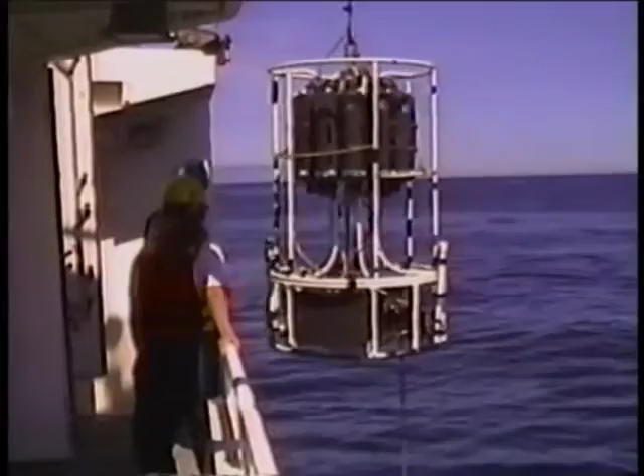Hi, I'm Mark Abbott, Dean of the College of Oceanic and Atmospheric Sciences at Oregon State University. The college focuses on graduate research, advancing the frontier of knowledge of the ocean, atmosphere, and Earth system, continuing to explore the edge, the interfaces between ocean and atmosphere, ocean and ice, land and sea, and deep ocean and sea floor. The college is one of the leading academic and research units at OSU and was ranked 5th nationally in the Decadal Survey of Graduate Programs by the National Research Council.

The college research benefits the state of Oregon through studies of its coastal ocean, tectonic hazards, and atmosphere. Along with research, the college supports graduate programs in oceanography, atmospheric science, geophysics, and marine resource management. The Native Americans in Marine and Space Sciences program is also housed within the college, and it provides effective mentoring and educational opportunities for Native Americans.

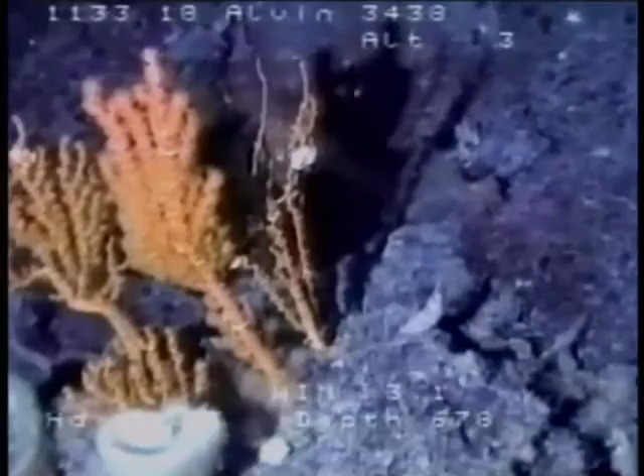The college is home of the Oregon Climate Service, which provides an enormous range of data products and analyses for customers in the Pacific Northwest and beyond. The college remains at the forefront in the development and use of observational and analytical instruments. Observations of small-scale ocean physics are pursued with increasingly sophisticated instruments developed by college researchers. The emergence of ocean and atmosphere observing systems, including coastal observations and seafloor cabled observatories, afford new opportunities for sustained observations of our ocean and atmosphere.

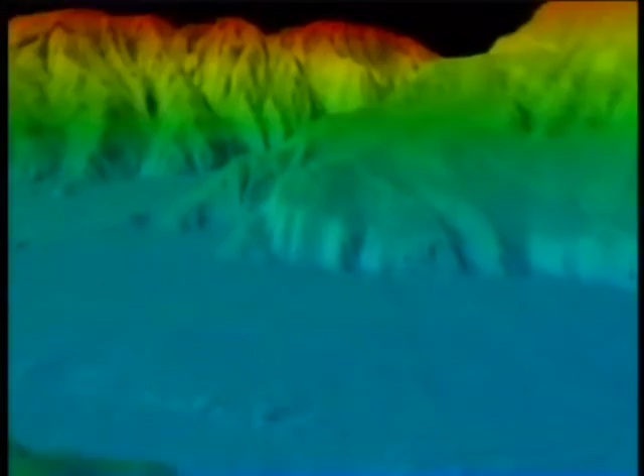Our leadership in satellite remote sensing of the ocean expands to ensure that future instruments meet the needs of both the research community and those who could benefit by these analyses. We continue to expand and upgrade our state-of-the-art analytical facilities to provide access to both college and non-college researchers. The college continues to build on its interdisciplinary focus, integrating atmospheric sciences with oceanography and focusing on the interfaces between ocean and atmosphere. The college is uniquely positioned to study the Earth system, both in the context of global scale research and local processes such as those that take place in the coastal ocean.

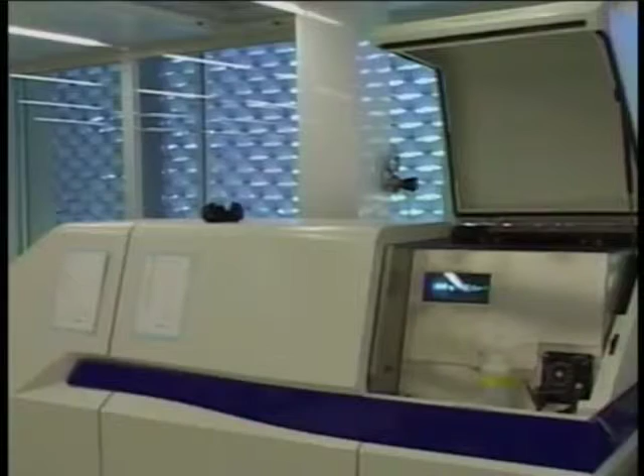Each of these research activities highlights the college's continuing commitment to research and education, relying on state-of-the-art technology and facilities. Our newest facility, a clean room developed as part of the W.M. Keck Collaboratory for Inductively Coupled Plasma Mass Spectrometry, in collaboration with several industrial partners led by Huntair, places the college at the leading edge for a vast array of new geochemical analyses to support research in geological, chemical, and biological oceanography. I would now like to introduce the Keck Collaboratory Director, Gary Klinkhammer.

Hello, welcome to the W.M. Keck Collaboratory for Plasma Spectrometry at Oregon State University in the College of Oceanic and Atmospheric Sciences. Our facility has actually been here over 10 years, but the clean room part of this is just completed. In fact, it's still under development. So at this point, that makes it a little easier for this presentation because we can show you some of our technology in a little simpler way.

What we do here at the Collaboratory is state-of-the-art science. In other words, we have equipment called plasma mass spectrometers. In this facility, we actually have 4 of these very sophisticated instruments. And these instruments are capable of measuring basically all the elements on the periodic chart. So in this facility, we're able to look at the elemental composition of just about anything on Earth and tell you what that's composed of. Now, while that sounds very esoteric, actually there's some very practical applications of this kind of technology, which we'll get to in a minute. So let me show you some of the instruments that we have here at the facility.

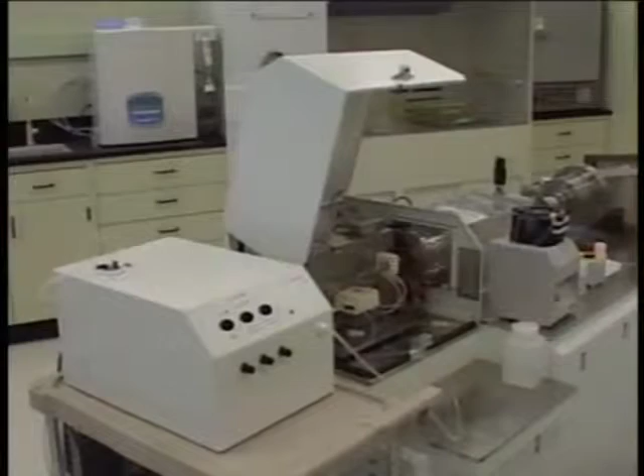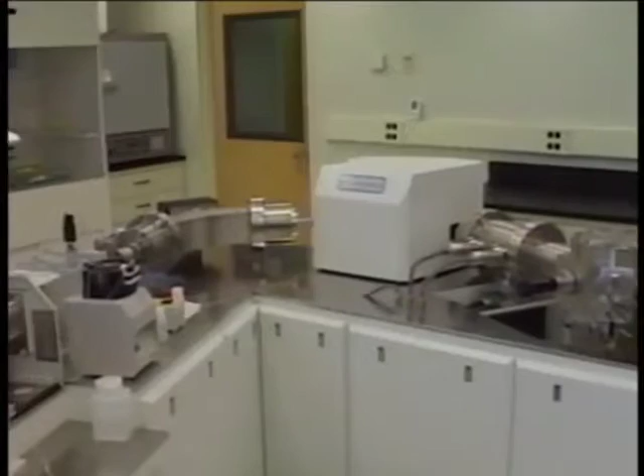Now this beautiful instrument represents the cutting edge of this kind of technology. This is the kind of instrument that we use for a lot of different things. It's very good at measuring the isotopic composition of materials. And this kind of instrument could be used for anything from measuring water quality to dating the age of the moon, for instance.

So there's a whole suite of science projects that we can undertake here now with this kind of instrument. But all these instruments, as I said, have this open front end. So they all require that the atmosphere the instrument lives in is very, very clean. Now this kind of requirement is rather new. This kind of instrument has only been around a couple years. So more and more, this kind of application requires really good clean room technology.

Now Dave Benson of Huntair was the first one to tell us about the possibility of having this kind of controlled, focused, clean air environment. And that's really the topic of this presentation. So the fan filter units that are above these instruments focus clean air down to where we really need it, which is where the sample is introduced into the machine. So the rest of this presentation will be talking about the fan filter units that make all this possible.

And so now we're going to go down to the studio, and I'll introduce the panel of experts who are going to tell us more about this great technology. Welcome. This part of our presentation is being brought to you live from the beautiful campus of Oregon State University. And what we want to do here, as I said, is describe the fan filter units in greater detail.

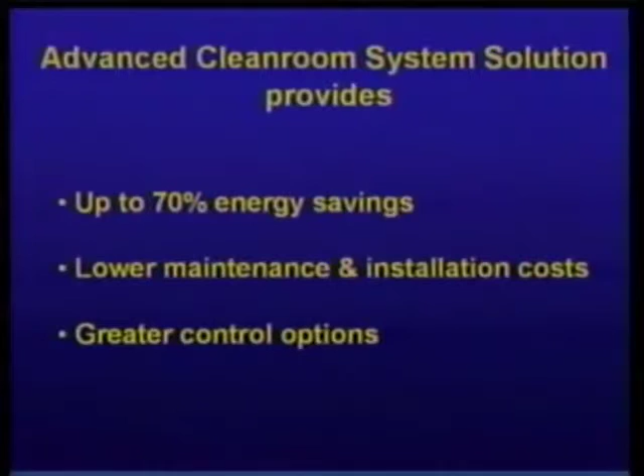We're going to be talking to the GE folks later about some of those control options with this technology. We can say that this technology is the perfect solution for our application, and that's pointed out in this next slide.

That's where science is today, and that is key to where we're going in the future. So the lower levels we can see, the better, and this technology allows us to do that. Makes our job a lot easier.

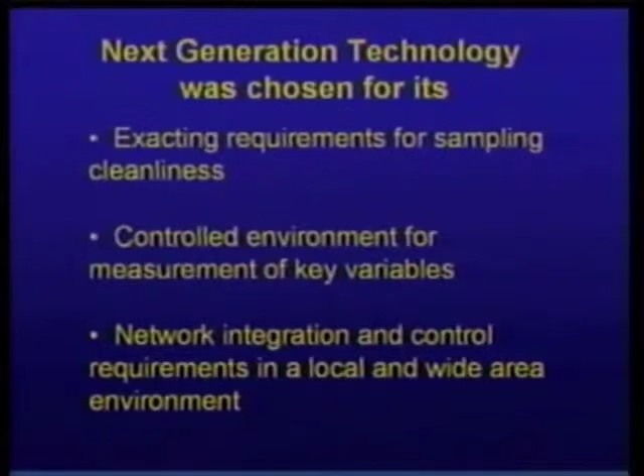Now, if we go to the next slide, we'll see some more broadly successful management of these conditions and where these things can apply. For one thing, they can apply to research and development facilities, which is what we are. But as we'll get on later in the discussion, we'll see that there's a wide range of other industries and research facilities that require these similar kinds of capabilities.

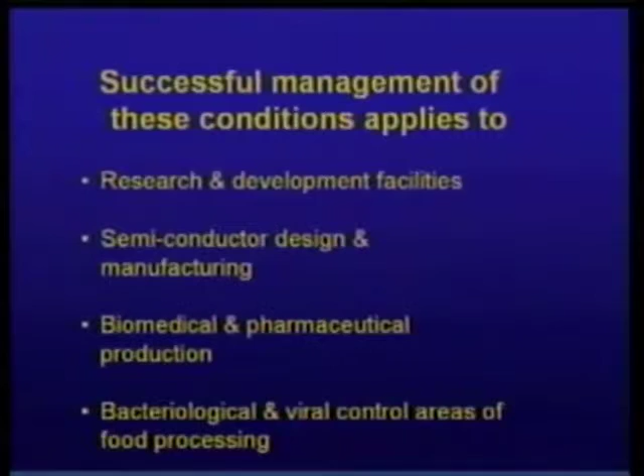Semiconductor design and manufacturing, biomedical and pharmaceutical production, bacteriological and viral control, areas of food processing. And I'm sure there are a lot of others we haven't thought about, and I'm sure you guys out there have thought a lot about it. So there are a lot of areas that this kind of technology can have an impact. It's a tremendous advance forward.

And if we go to the next slide, we can see I just want to point out again the 4 primary contributors to our project: GE Industrial Systems, who have made the advanced motors and motor controls that go into this fan filter unit, and GE Fanuc, who integrate the network controls - we're going to have Steve tell us more about that.

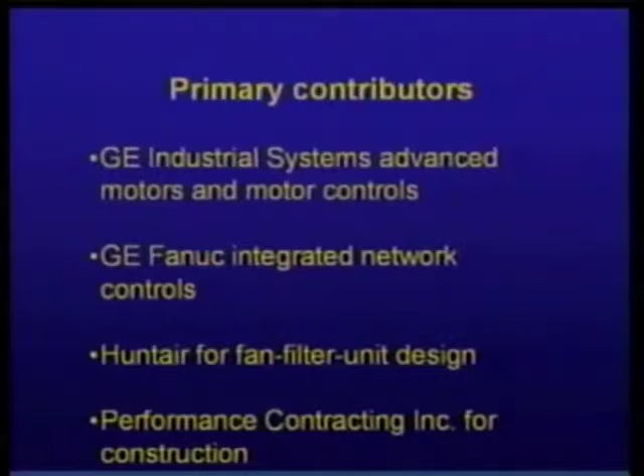Huntair came up with the fan filter unit design itself, and in our case, Performance Contracting Group, Inc. actually installed the equipment in our facility. So what we're going to do now is go around the table and let each of our experts tell us more in greater detail about their part of the project.

So now let me present Dave Benson and Larry Hopkins from Huntair, who will give us an overview of the room and the challenges they faced when doing this project.

Thank you, Gary. One of the primary steps that we must undertake, like Gary described, is understanding the process that needs to take place within the facility, and designing the equipment to specifically meet the needs of the science or process that takes place within the facility.

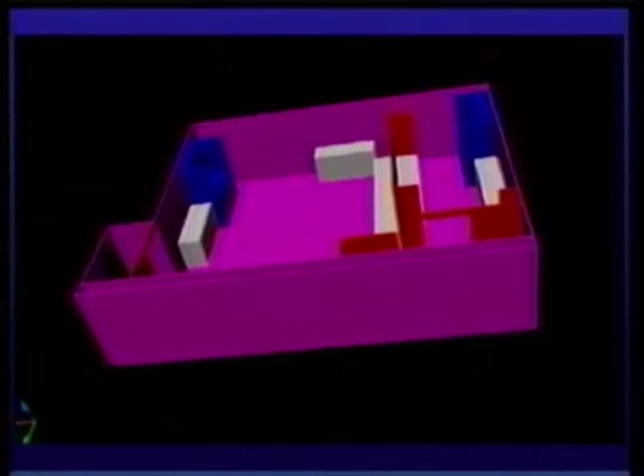In this case, if we could have the next slide please - we utilize extensive modeling to assist us in our design and application of our equipment. This 3D model is of one portion of the laboratory where we can identify the various different pieces of equipment that are in the space, identifying the cleanliness levels and requirements for each piece of equipment, and identify points of supply and return out of the space.

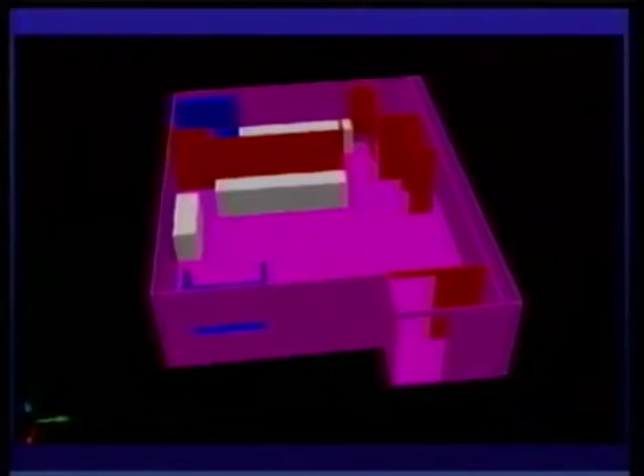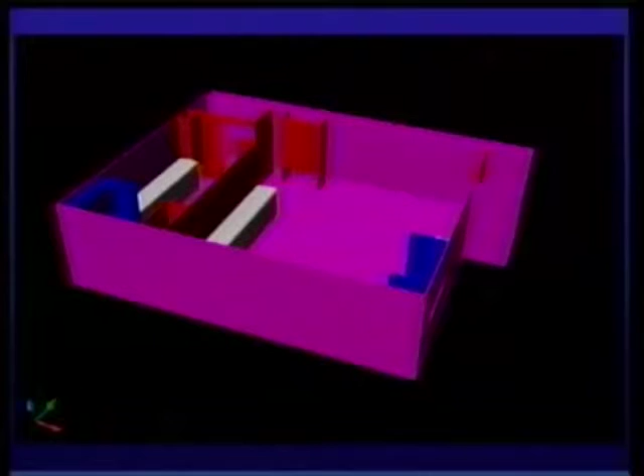Next slide, please. We were very limited in overhead space to incorporate the mechanical components that were required to achieve these objectives in the space.

Along with the 3D model of the space itself, we use extensive use of computational fluid dynamic modeling to help us understand the velocity profiles and pressure contours within the space so that we can assure ourselves, as well as the university, that we're going to achieve the results before physically building the building and turning the power on.

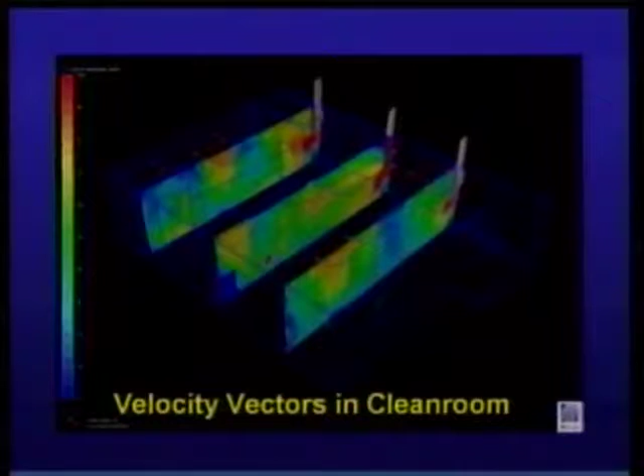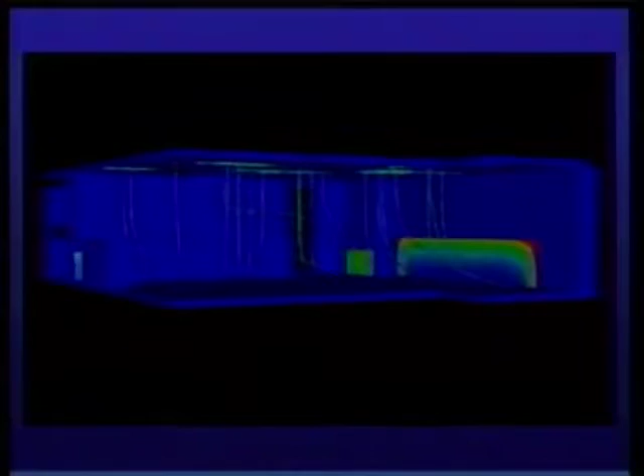Next slide. And this part goes into a technical aspect of then our FFU, which I'll refer over to Larry Hopkins.

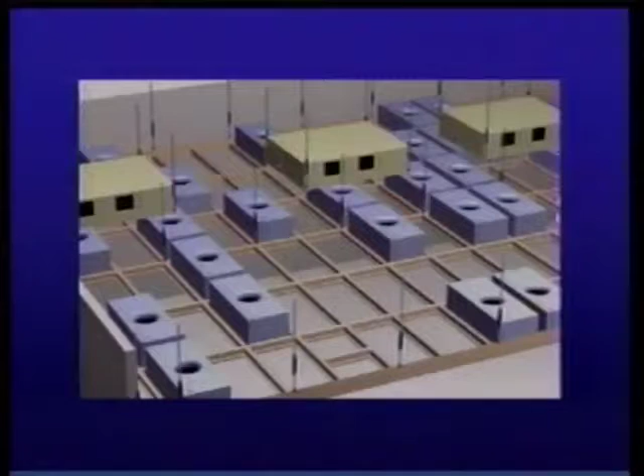Thank you, Dave. At this point, we'll talk a little bit more about the FFU and what was physically changed, or what is different about this generation of FFUs that gives us an energy advantage. At Huntair, we're very familiar with the requirements of semiconductor, pharmaceutical, and biotech facilities in terms of cleanliness and extreme standards set for vibration, airflow, uniformity, and energy consumption.

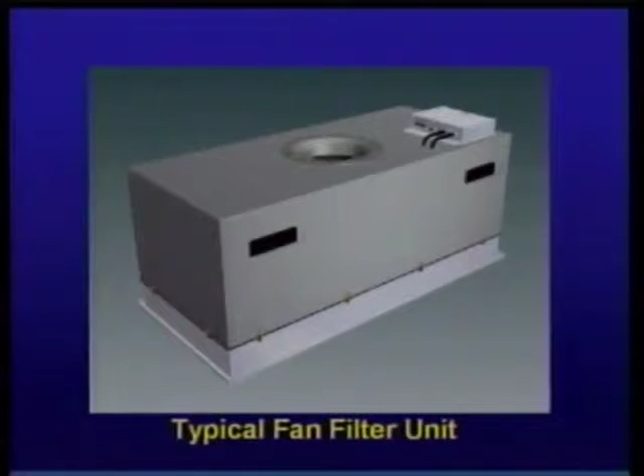Next slide, please. So we took a look at the FFU unit, which is the prime mover in the space. This is basically what generates the air. It presents the air to the room, and it recirculates that air over and over again, basically continually purifying the air to present the clean process air.

So at this point, we'll take a look inside the FFU and talk a little bit more about what we did to create the next generation FFU system.

On the upper left of the screen is what you could call a more traditional FFU unit, and these have been on the market for some time. There's probably basically four components that make up the usual FFU design. We have the inlet at the top of the box where the air enters. We have the impeller or the fan section, and we have a fairly large baffle that's located below the impeller that really serves two purposes.

One is it creates a separate little plenum which enables the fan to develop pressure, and it also creates some noise control. The air then migrates around that partition and then is presented to the face of the filter, where it's ideally supposed to flow through the filter in a very uniform fashion.

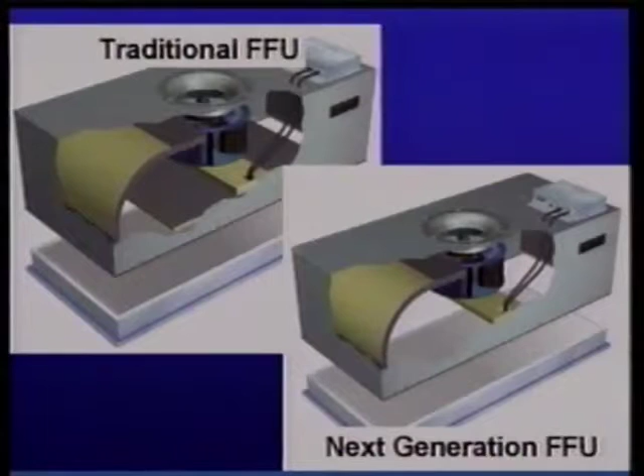The FFU on the lower right of your screen is what we'll call the next generation FFU, and you'll notice that there's no separating baffle. We felt at the time that if we could develop a fan wheel that would pressurize the space, the plenum above the filter, and be low enough in noise and be energy efficient, that we could then reduce that restriction and increase the overall efficiency of the system.

Next slide, please. This is the depiction of the results of that in terms of an airflow study. The image on the top shows in red tones higher velocity air patterns, which is really what we're trying to avoid. We're trying to present the face of the filter with a fairly uniform pressure gradient so that the air then just migrates through the filter in a well-behaved pattern, and we have a good uniform passage of air and we absorb the particles.

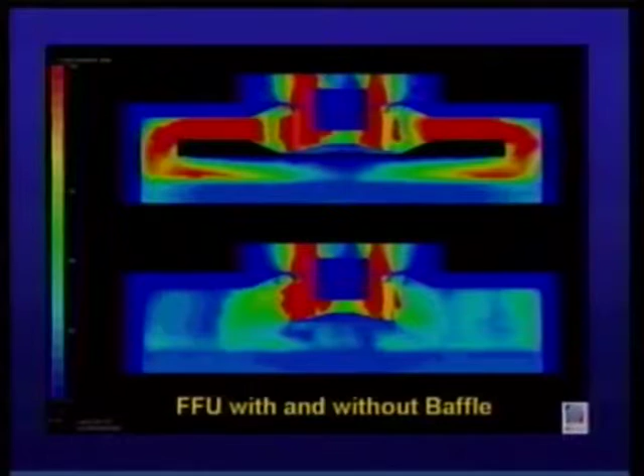The image on the bottom shows what we actually attained analytically, and it uses a fan system that's capable of pressurizing the plenum without the use of the internal baffle. Next slide, please.

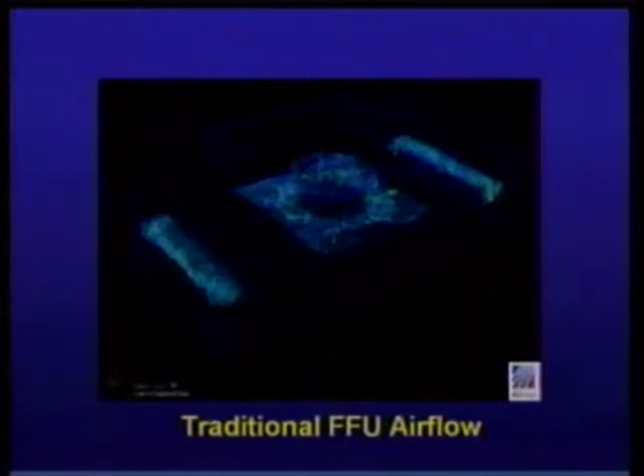This image depicts for us what might be considered an airstream. As it enters the top of the FFU, it migrates through the fan or impeller. It traverses across the target baffle in a traditional FFU, makes a 180-degree turn, and then is presented to the filter. As we can see, in this particular case, there's quite a bit of static resistance to airflow.

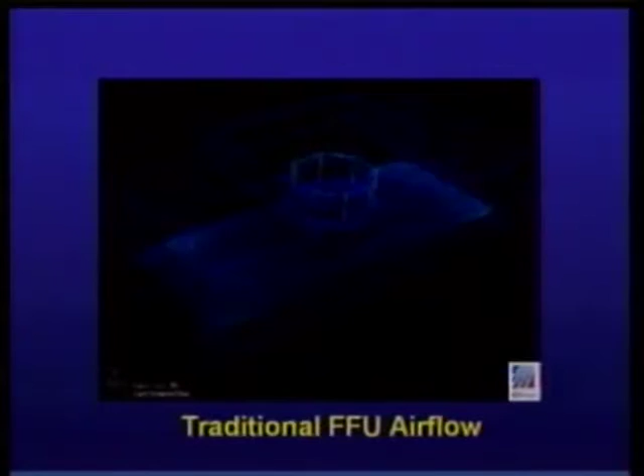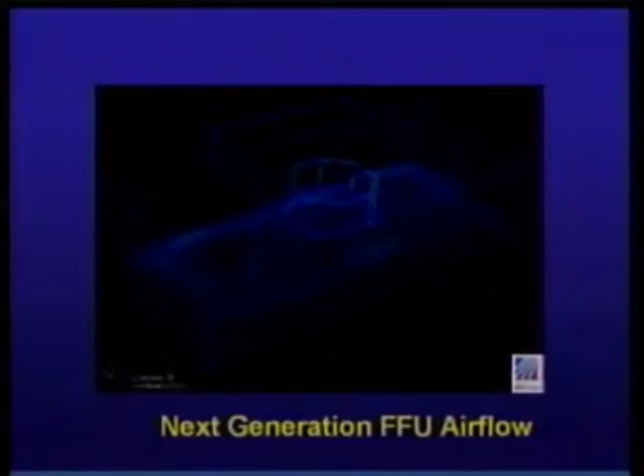In the next generation FFU, we eliminated the baffle by redesigning the fan wheel, and we ended up with an air pattern that comes into the fan wheel. It's distributed into the plenum above the filter face in a radial fashion and a very uniform fashion, which then proceeds down through the filter in a uniform manner.

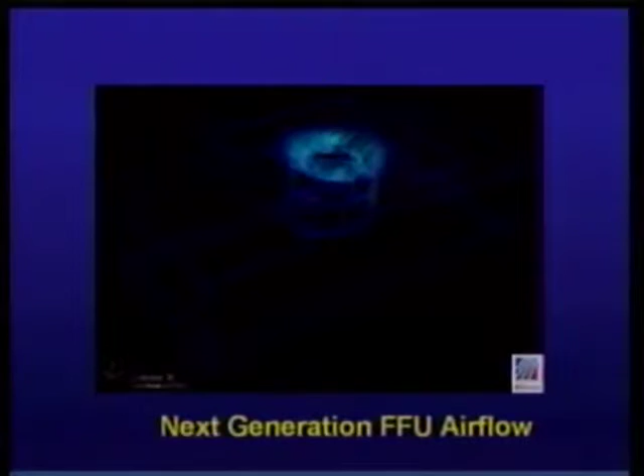So really the effort here was to develop a cleaner air path, and to do that we had to develop a better fan wheel. We have one more slide, I believe.

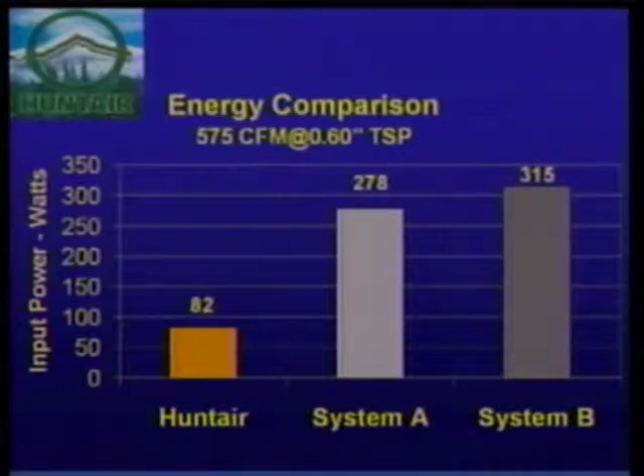The next slide. And this is probably the end of the story. What we have here are traditional systems shown as System A and System B, and what we achieved in the Huntair effort is shown on the left. Those columns represent power, and the column on the left represents 82 watts, while the other two columns are up closer to 300 watts on average. So essentially, to do the same exact job in a clean room, the next generation FFU requires about 70% less energy.

Thanks, Dave. Larry, that was great. It's a lot of stuff that I didn't know, and I really like those graphics. Of course, us scientists really like those models where you see things moving around. We do a lot of that in oceanography as well. It beats the heck out of my hand waving in the lab about the air going around. That was very informative.

One thing Dave mentioned that I forgot in my intro is that this technology in the Keck Collaboratory is only good for a limited amount of time. Unfortunately, the instruments are very expensive, but technology changes. We envision these instruments will last 5 to 6 years, and we'll be replacing them. That's one of the valuable things about this approach: we can change the organization of the lab, get a new instrument, change the positions of these fan filter units, and be set to go. That's really important in a public institution, that we can reuse resources very efficiently.

Dave mentioned another important thing: this is a renovation project, and we're working in an old building here. Getting that grid up there was not something planned for when this building was built, let me tell you. There's a lot of stuff up there, and it was amazing how much work it took to get that grid up there. That's really where our PCI came in. Those guys did a tremendous thing in putting this all together.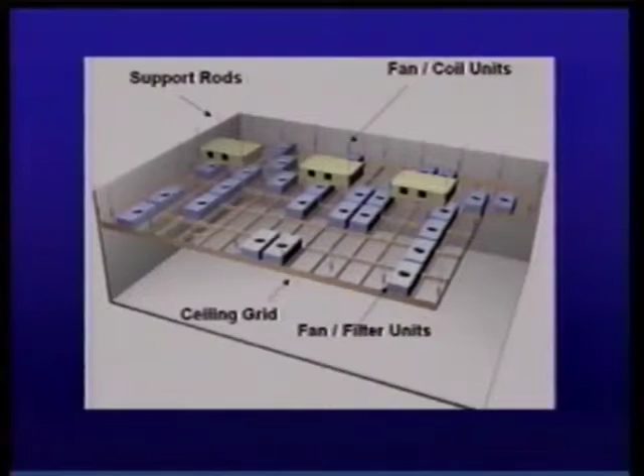Go to the slide, Bob. There you go. We've seen this before, but this is an artist's depiction of the clean room. And clean rooms are typically built from the top down, and this project was no exception. We start by installing what's called an interstitial support system, which generally consists of attachments to the existing structure, rods that drop down to support a strut system that is installed to conform to the layout requirements of the Huntair ceiling system. If we could go to the next slide.

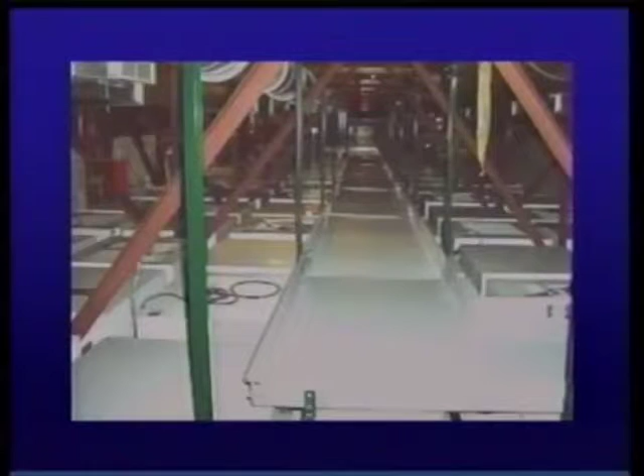This is an actual interstitial above the ceiling. As you can see, it's very cramped. The interstitial at this clean room that we built for Oregon State had about 25% of that room. So there was a great deal of work went into a very small space. But once the interstitial system is installed, we install the Huntair grid modules and level them to the proper elevation, which is very important because the next operation is installation of the walls and doors.

And the walls integrate directly into the Huntair ceiling system so that there is a laminar flow of air, plus these walls incorporated a sidewall return at the bottom of the wall, a very important aspect. We then performed a complete wipe down of the room and everything in it, and installed the fan filter units, blanks, and filters. Like Gary mentioned, flexibility in the clean room is very important, and the ability to move and change items within the clean room is facilitated by this ceiling system.

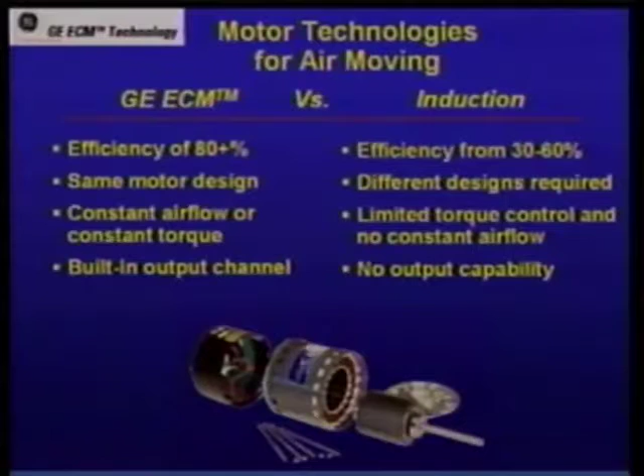The fourth item that I want to point out is the output capability. As we're going to see here in a little bit when we go to our embedded reporter and Steve gets a chance to talk about the control scheme, you're going to see that the output from this product is utilized to see how that motor is operating and if the fan filter is even on or off. So we're going to go to that a little later in the presentation, and I hope everyone finds that an interesting point because a conventional motor does not have that output capability.

Let's expand on the efficiency a little bit and go ahead and look at the efficiency graph here. Two items that I want to point out to our audience on this. The first is the item on the far right of the page, which just shows the inherent efficiency benefit. The orange trace is the ECM motor, and the light gray trace up at the top is a typical induction motor. So at its rated point, all the way on the right-hand side, just the pure efficiency at the full load point is over 130 watts of efficiency, which is pure money and energy savings.

But the real value of this product that brings the technology to life is that it has the ability to reduce power tremendously as you reduce the speed. There's 2 points on that graph that I want everyone to focus on. The first one is at 1,000 RPM. At that point in this particular graph, the product is using 280 watts of energy.

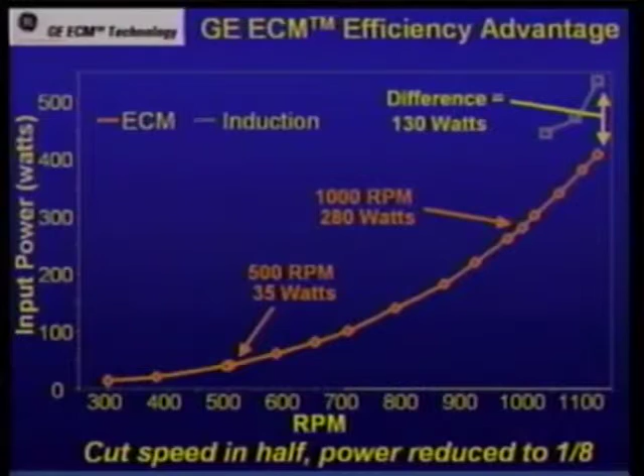The really interesting point here is if you cut that in half and go from 1,000 down to 500, the actual energy usage goes down to 35 watts, which is a 1 to 8 factor. So as you reduce the speed in half, the power goes down by a factor of 8, which is tremendous, and that's one of the features that Huntair has really leveraged to be able to deliver this, is the ability to operate this at a lower speed.

If we go to the next slide, we'll see exactly the components of the product that enable this technology. And there's kind of 4 main ones. First, this product contains a permanent magnet inside it. That permanent magnet is what provides some of that inherent efficiency I just talked about on that previous slide over a standard induction type motor. Second is this product has a ball bearing construction. That's very critical for reliability.

As Gary has talked about, yes, this may only be used with this setup for 5 years, but the fan filters actually hopefully will have a much longer life than just the life of the equipment in the room. So with the ball bearing construction, this product can actually have that long life that the end user and the original equipment manufacturer is looking for.

Third benefit is that this product has an onboard microprocessor, and this is really the guts of the product. It's the heart of what brings this product to life. It enables the interaction with the control system. It also enables the end users in the lab to make the changes in speed and to do the work that they need to do on the product, and is really the key item that drives this product as it continues to go. If we look then at the fourth item, it's the development software.

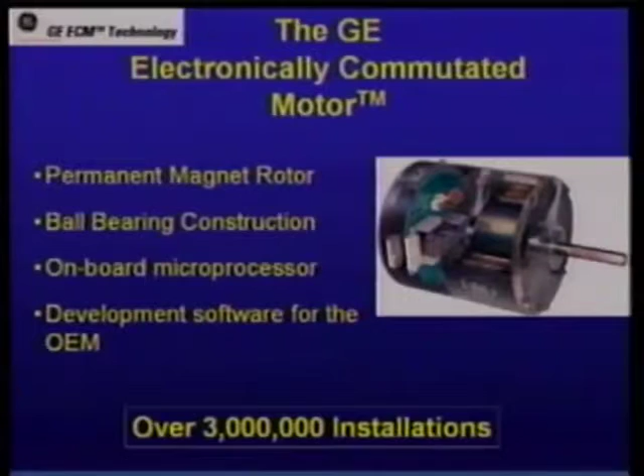The software is what allows both the end user and the OEM to tune in this product to work for the end user's application in the clean room. With that, I want to just wrap up by saying that the efficiency and control flexibility of this motor has enabled us to deliver over 3 million of these units out into the world in various applications to deliver high efficient energy savings, and also air moving.

Thank you. Thanks, Paul. That was really impressive. I mean, you really drove home some good points there. One thing that I thought of was the time when I was talking to Dave Benson the first time, and he mentioned the fact that there might be a new motor out there, a new technology that we could use in the clean room, and you could control it digitally.

Of course, I just went nuts on that and immediately wrote Dave an email saying, oh, sure, we want to do that. We want to be able to control these motors. And that would be really a cool thing to do. And so since Dave's a go-for-it kind of guy, he put it all together and now we're at where we're at today. And part of the key to that system is really the software control.

I mean, that's really important for us, and I'm sure there are a lot of other users out there, potential users, that could use this kind of capability as well. The idea that you can adjust the speeds on these fans is really a pretty neat thing. And Andy later is going to tell us some reasons why that's important for us, but like I say, I'm sure there are other people out there that could appreciate this as well.

So we're going to delve into that aspect of the technology here a little bit. And Steve Johnson's going to tell us a little bit more about the software that makes this go. Thank you, Gary. By using the low-end standalone programmable logic controller along with a 4-wire network, we stayed flexible and distributed. Now let's look at some of the slides involved in it. The small footprint, low-end GE Fanuc Nano filled the needs with what we had. Next slide.

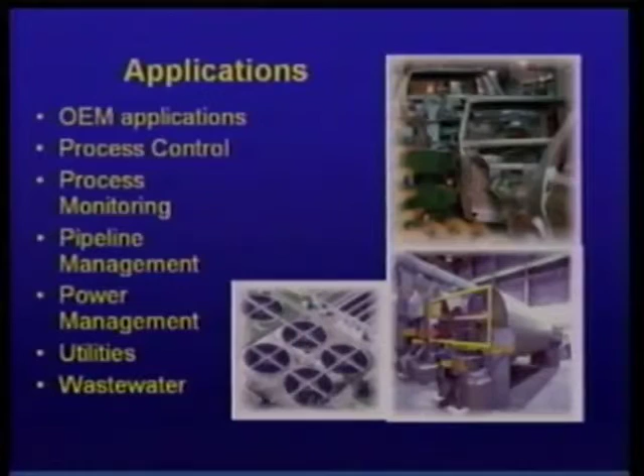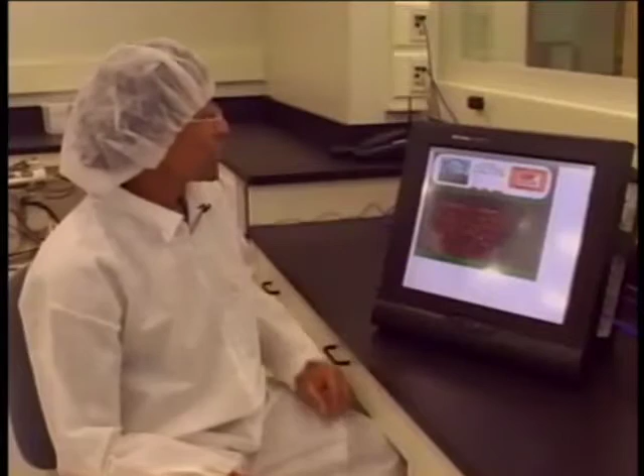Next slide, please. These products are used in many other industries, as are shown here. And now let's take a closer look at the operation as Andy shows us some of the control aspects. I'm here at the Huntair fan filter control unit that uses GE Cimplicity software to control the fan filter units. And what we're showing over here now is the general overview of the room layout.

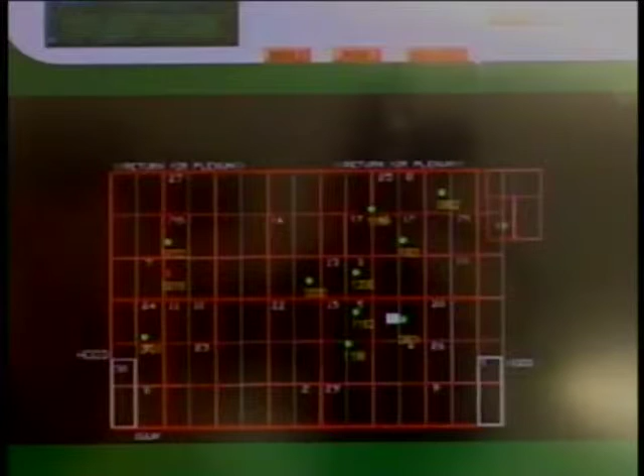On the right side we have the wet lab for processing samples, and the left 2/3 here is the area where we have our mass spectrometers. We have several panels that are part of this control system. As I said, here's the layout, the overview that shows the status of the fans and the locations of them.

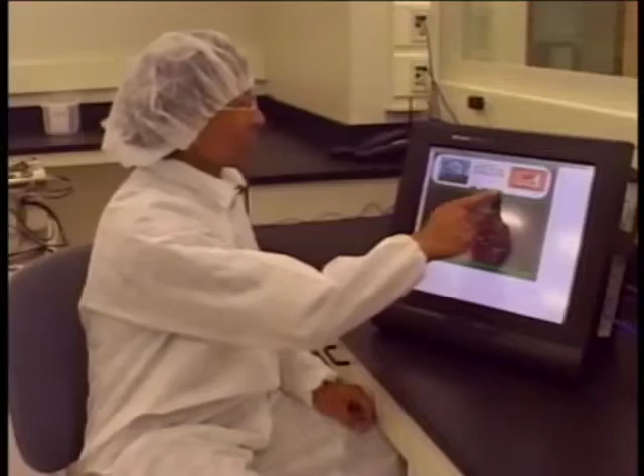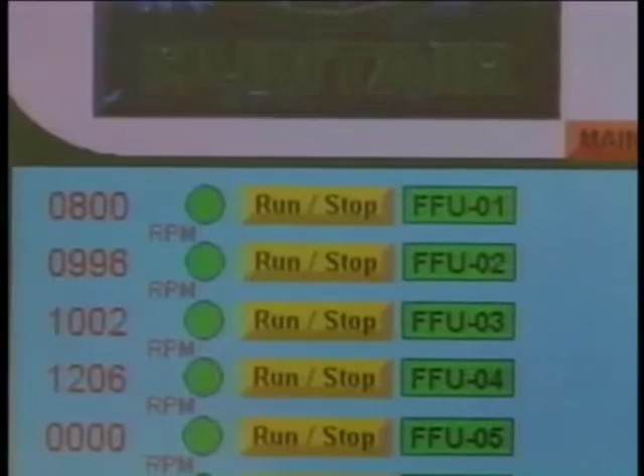And we can also switch here to a different panel that now shows in a more digital format the fan conditions. We have a fan status display here that shows the off-on of each of the fan units, listing them all individually. We have a speed readout that shows the RPM of the fan filter units.

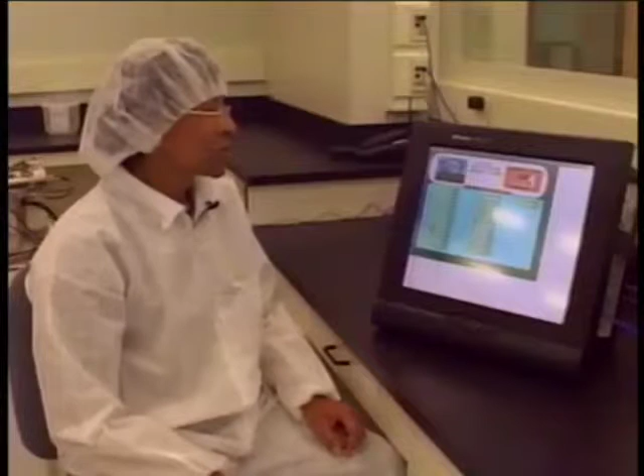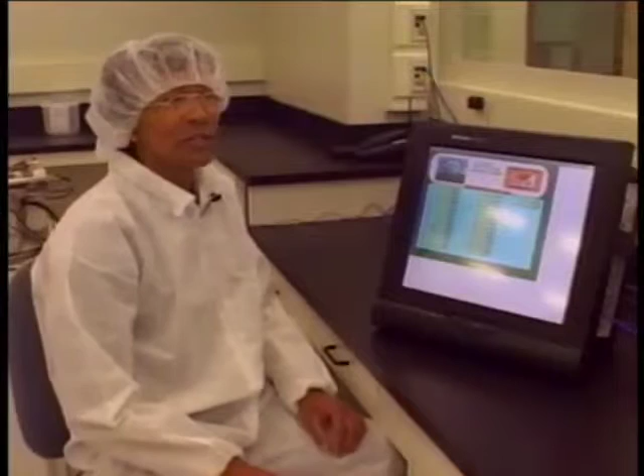And we can stop these fan filter units from this screen. Having this individual control of all these fan filter units is really beneficial for us because it allows us to concentrate clean air over the instruments and also slow down the amount of air movement in certain areas, for example, in our balance room, where we're running the lowest speeds.

In addition to that, we can also control fan filter speeds in our sample processing area where we want more clean air flowing, especially near the fume hoods.

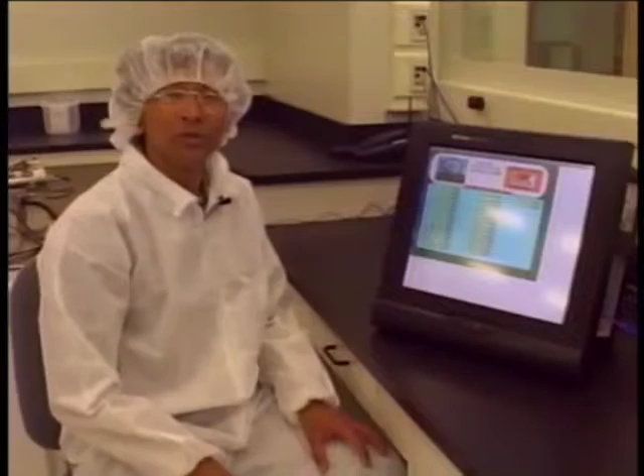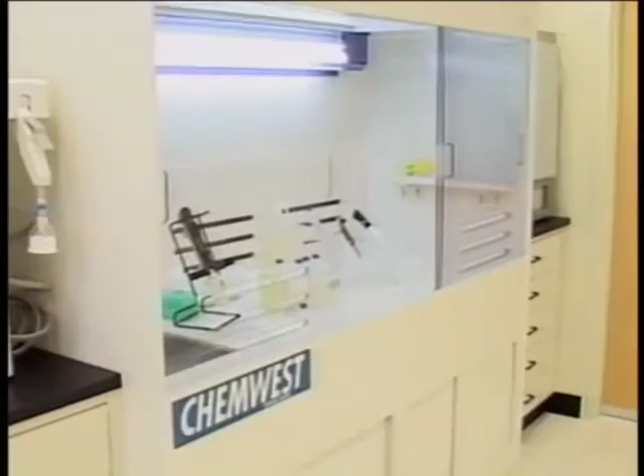So we have one question here already, and it's kind of an interesting one, actually. Are there FFUs anywhere else in the clean room other than the ceiling, which is the obvious place that you should go, I guess? Okay, I think we need to go to our embedded reporter for an answer to this question. Andy, you there? Yeah, I'm here, Gary. Yeah, that's a pretty good question here.

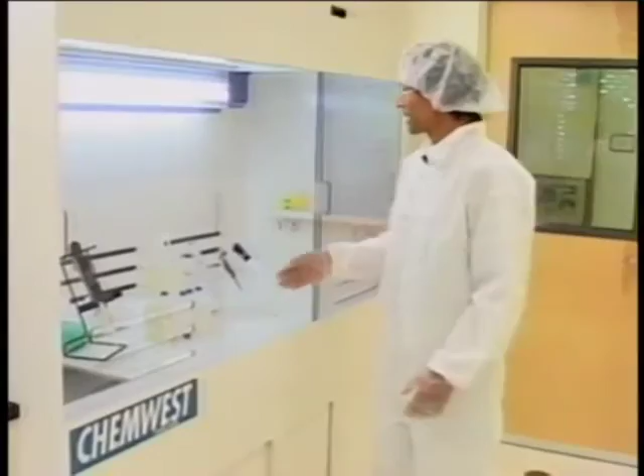In addition to the units in the ceiling, we have a need here for having fume hoods for processing our samples. And we had ChemWest of Portland, Oregon build us this all polypropylene clean hood, and we refer to this as a clean hood because in addition to the fume extraction capability, it also incorporates one of the Huntair fan filter units on top that puts down a whole blanket of clean air over our working area so that when we're diluting samples out here, we know that we have clean air over our samples.

Well done, Andy. Don't mess anything up there. I'll be back there in a few minutes.

Now, let's go on. There's a couple of questions here for GE ECM. Question number one, how does the efficiency compare between standard motors and variable speed ECM type motors at reduced airflows? That's pretty technical. The best way to describe that was shown on the graph earlier, but to basically sum that up, it's two things. One is the efficiency of the product versus typical motors is just inherently more efficient, and that's typically 10 to 20 percentage points of efficiency.

In addition to that, though, this question's interesting because it talks about the reduced airflow, Gary, and that's really where the power of the product is. When you reduce that airflow, which is in fact typically reducing the speed, the actual energy is reduced by a factor of 8. So the energy used in an ECM is 1/8 of the amount of energy that was used previously at those reduced speeds, and really provides the end user, in this case you guys in the lab, a real benefit in terms of your energy bills because you have one of those motors in each one of those fan filter units.

Right, good. Here's another one. This guy is thinking about if he was reconfiguring a clean room layout with ECM equipped FFUs, what kind of issues would he face? Yeah, let me talk a little bit about changing the ECM in that, and then Jeff might have some input too from what's involved in the construction to change around the room.

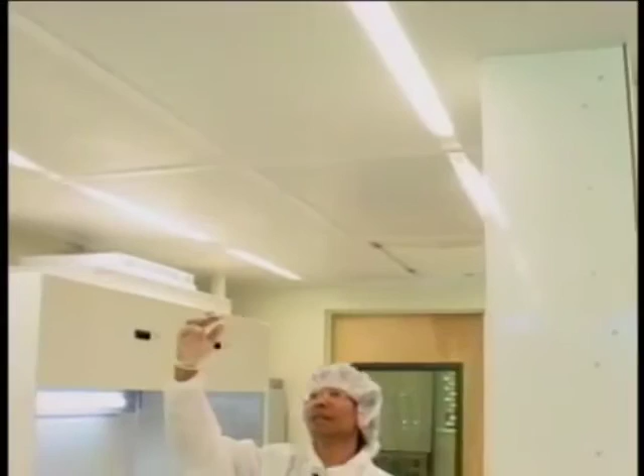So I'm right now pointing at one of these 2x4 face cleans, and the interesting thing here is you can't tell when you're looking at these which one is a blank panel and which one is an FFU. But of course we know where they are. But if we wanted to change that, we pop out the face clean, and as Jeff was saying, lower the fan filter units and put it in its new place, and pop back up the face clean, and it looks like a finished ceiling again.

It's got to be easy. Even a bunch of scientists can do it. Let's face it. Okay, so let's move on.

Here's a question I think maybe Dave Benson might want to field. What are some of the elements of the clean room design that make the OSU installation and configuration unique? You could probably talk a couple days on this one. Dave? Well, probably the element that was most unique about this application are some of the items that we've talked about, in that this was a very old facility, and architecturally there was not the space that we would have in many of our newer installations and facilities.

The system is designed down to Class 1. In this case, we're Class 1000 with localized Class 10, but we had approximately 25 inches to incorporate the sensible cooling, the fan filter units, and the ceiling grid around walls and shapes within this old facility that weren't necessarily at right angles to each other. So it was a challenge to us from a manufacturing standpoint, and to Jeff and the PCI crew on getting it installed. Thanks, Dave.

Larry, here's one that you might want to tackle. How do sound and vibration levels within the OSU facility compare to other facilities using traditional designs, and how do they compare to industry standards? Well, sound and vibration levels in clean rooms are very, very important. In fact, sometimes architects and engineers completely isolate a facility like this from earth in certain respects, to insulate it from, say, train pass-bys, roadways, and so forth. So we have to be very careful in designing the FFU not to generate vibration that's going to be transmitted to the grid system and subsequently to the floor.

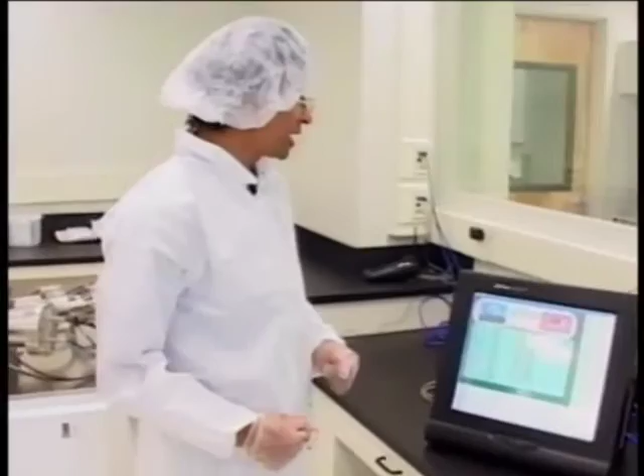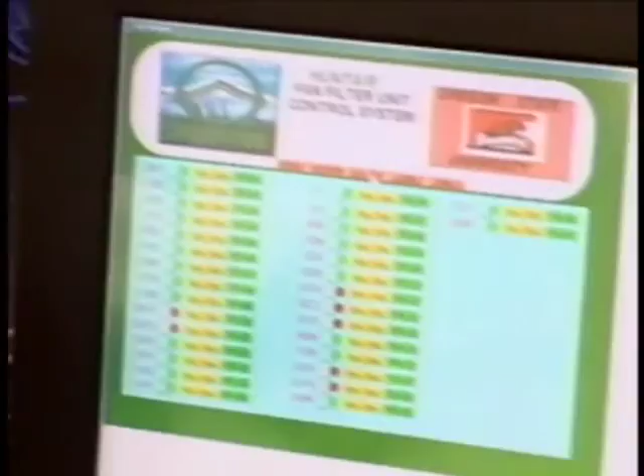I'm back over here at our touchscreen panel, and as Steve was saying, we have individual control here of these FFUs. We can turn them on, turn them off as we need, and change the speeds on this screen. So it's really pretty powerful, especially in specific areas when we really know what we want to have clean air in the fume hoods. We can turn up the speeds, and it's pretty easy to do.

Over our mass spectrometer, where we'll have samples on which we're trying to measure parts per trillion or parts per quadrillion quantities of metals, it's really important to have clean air in those locations. We can go in there and turn down the speeds when we're not using it in that capacity, for energy savings, or turn it up for maximum capability when we need that for the best analytical data.

I guess you could see from the screen there that Huntair has taken the CIMPLICITY software and kind of adapted it, specialized it for our needs, but that's pretty cool.

Here's another one that Steve might be able to deal with: how do you network your small PLCs, Nanos, to control the fan filter unit? That is done through a serial port on the Nano itself. You can set it as, some people know, Modbus RTU serial, and you connect 32 of them up on a 4-wire network. You connect that into an Ethernet port so you can jump on the actual TCP/IP network of the facility, and bring that right into CIMPLICITY, reading the data in and out of the different individual programmable controllers into the CIMPLICITY unit. This gives them the flexibility if they do want to move the ceiling grids around, they can do it by just moving those 4-wire conductors around.